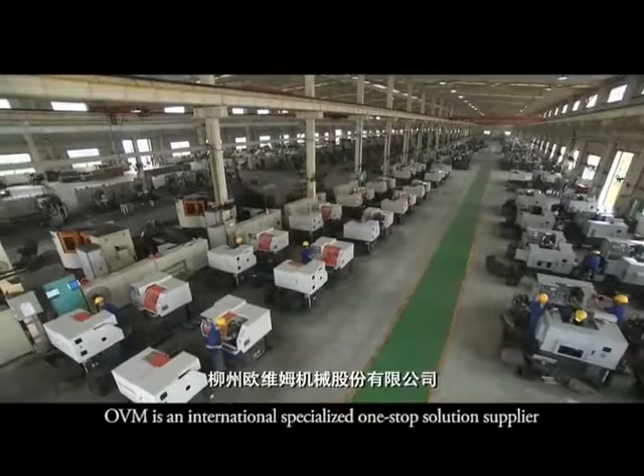OVM is an international specialized one-stop solution supplier focusing on research of pre-stressing technology, providing related systems and construction services.

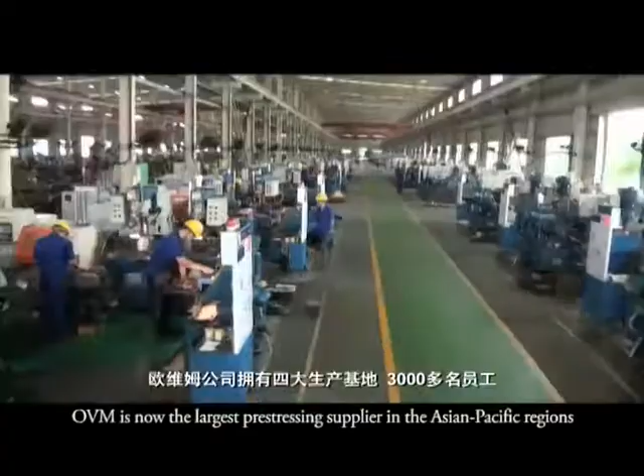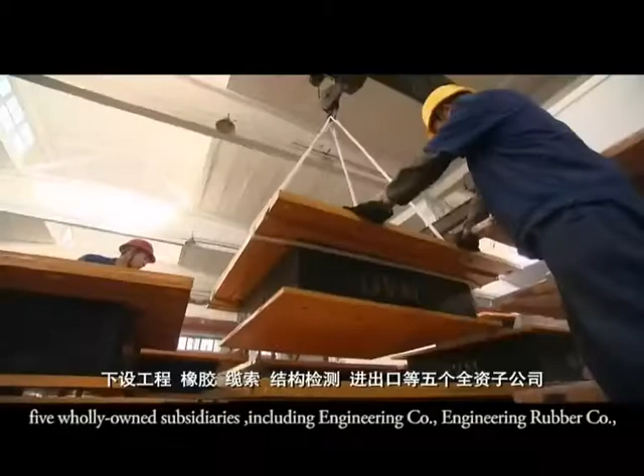Established in 1966 with the name of Liuzhou Construction Machinery Factory and renamed to Liuzhou OVM Machinery Company Limited in 2003, now a subsidiary of Liugong Group. OVM is now the largest pre-stressing supplier in the Asian Pacific regions, with 4 production bases, more than 3,000 employees, 5 wholly owned subsidiaries including engineering company, engineering rubber company, cable company, structure monitoring company, and OVM International Limited, and also the holding company of Shiping OVM Company and Hong Kong OVM Engineering Company Limited.

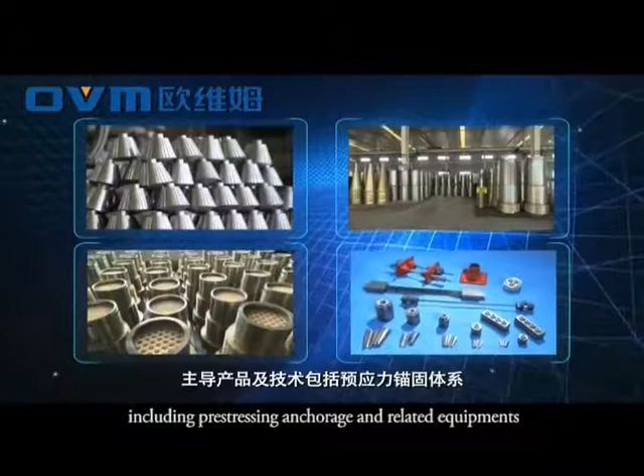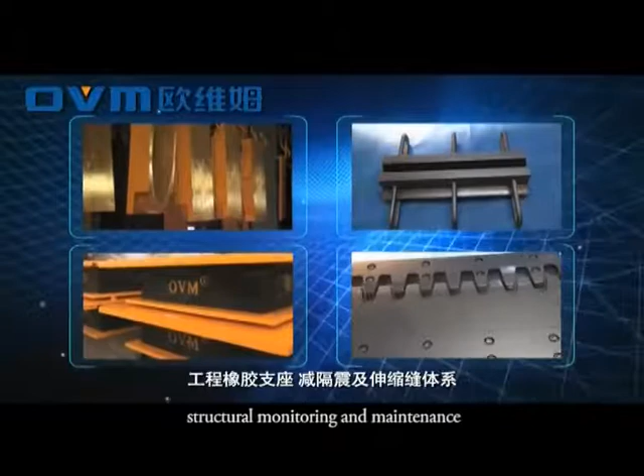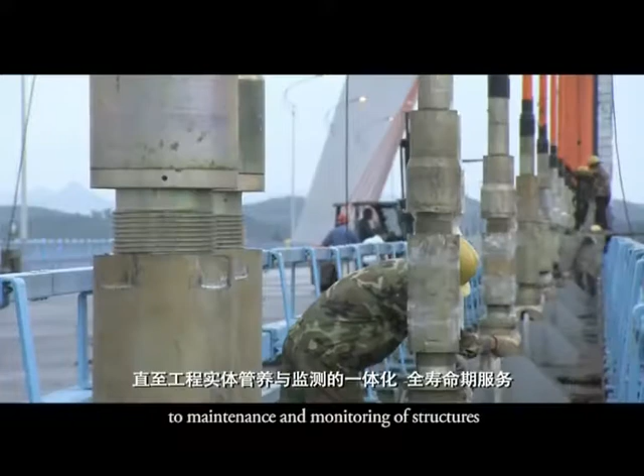OVM has 50 years experience in manufacturing and supplying pre-stressing systems, including pre-stressing anchorage and related equipment, engineering cable, engineering elastomeric bearings and expansion joints, anti-seismic systems, structure monitoring and maintenance, new products and materials. Based on these, OVM has the capacity to offer full-range services from consultation, design, production, construction to maintenance and monitoring of structures.

As the leading pre-stressing company in China, OVM always plays as the pacemaker in quality management. OVM is the first company qualified by ISO 9001 quality management system and BSI certification in Chinese pre-stressing industry, and also qualified by European ETA and CE certification.

OVM has more than 400 professional engineers and technicians, and has long-term cooperation relationship with more than 10 well-known universities. Hundreds of renowned professors and experts are invited to join OVM as technical consultant.

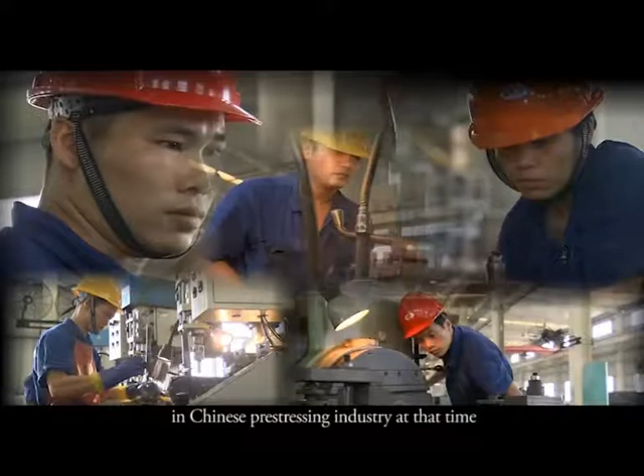In 1996, OVM Technology Center was entitled as National Enterprise Technology Center by Chinese National Development and Reform Commission and 3 other government ministries, becoming the only technology center to get this award in Chinese pre-stressing industry at that time. In 2001, OVM cooperated with Tongji University to establish Tongji OVM Pre-stressing Research Center.

After that, OVM Postdoctoral Research Center was set up. OVM always keeps a leading position in the field of Chinese pre-stressing technology.

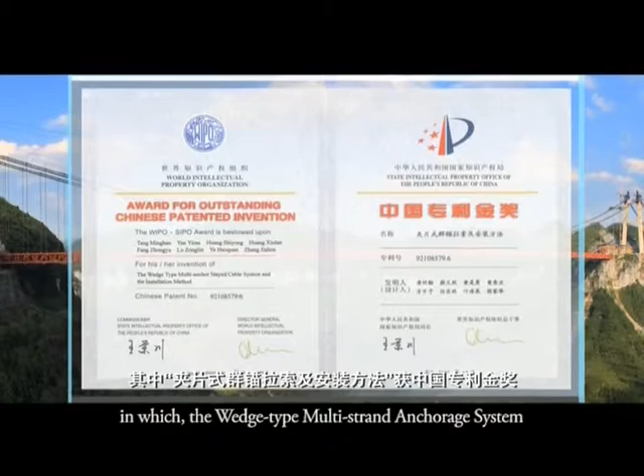OVM has participated in drafting more than 30 national and industry standards, achieved 56 national or provincial technological innovations, 36 patents for inventions, and 359 patents for utility models, in which the Wedge-type multi-strand anchorage system and its installation method was honored with the Chinese Patent Gold Medal.

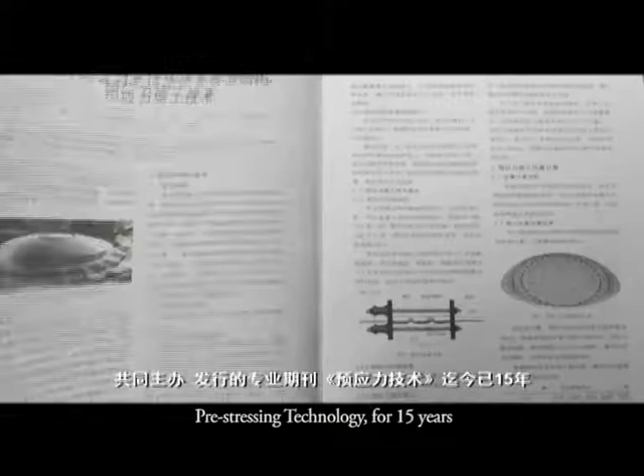In order to promote the development of the pre-stressing industry, OVM has sponsored and published the professional periodical Pre-stressing Technology for 15 years, which has become an important technology exchange platform for the pre-stressing field in China.

Complete and efficient marketing networks help OVM supply excellent products and services. In China, there are 7 regional marketing companies, including more than 30 marketing centers. The marketing network is spread all over China.

After 20 years of overseas development, OVM's global network covers more than 60 countries and regions around Asia, Africa, East Europe, Latin America, Middle East, and Russia. OVM's products and solutions have been extensively applied to the construction of highways, railways, bridges, buildings, mines, hydroelectric and nuclear power plants.

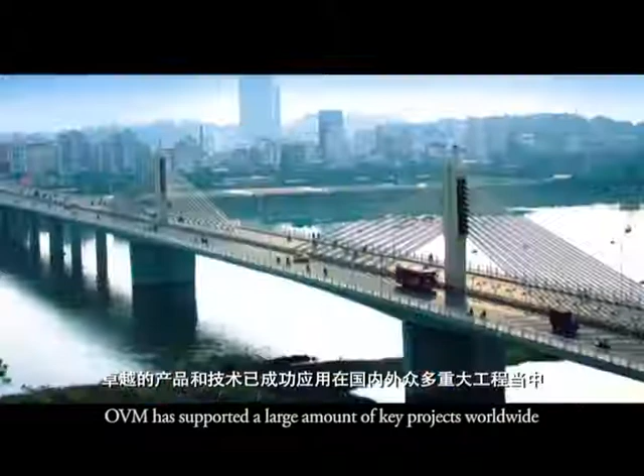OVM is the only Chinese pre-stressing company to enter the field of ocean salvation, nuclear power, and LNG. OVM has supported a large number of key projects worldwide with its high-quality products and excellent solutions.

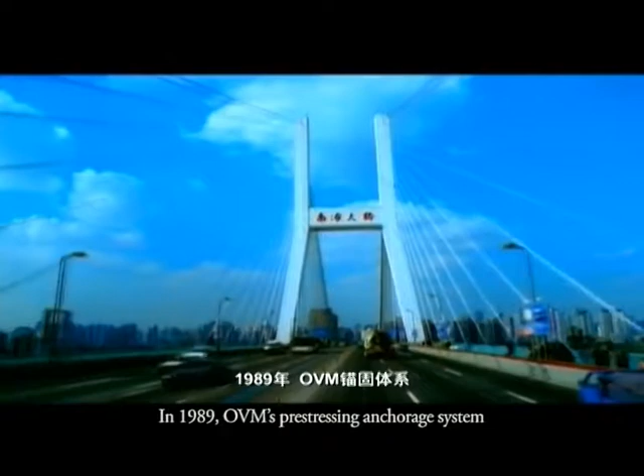In 1989, OVM's pre-stressing anchorage system was applied to Shanghai Nanpu Bridge. After that, in Yangpu Bridge, and the Beijing-Shanghai High-Speed Railway, OVM's pre-stressing anchorage system is widely used in numerous key projects.

In 1993, OVM lifting system was successfully used for construction of the Oriental Pearl TV Tower, lifting a 450 ton, 188-meter long antenna post to the top of the tower, which is 350 meters high.

OVM anchor block system for suspension bridges, OVM cable system, etc., were successfully applied to many projects in China and overseas.

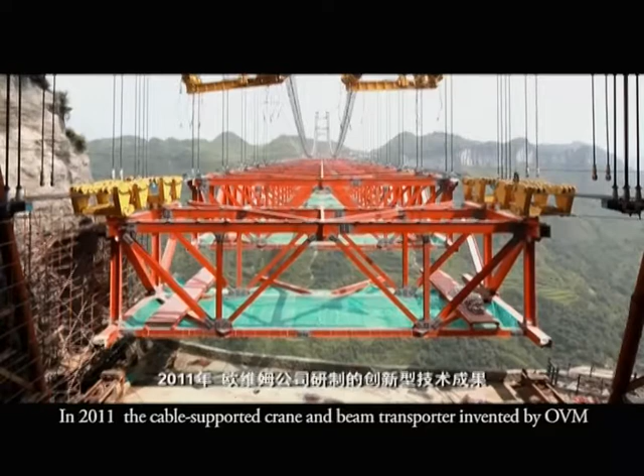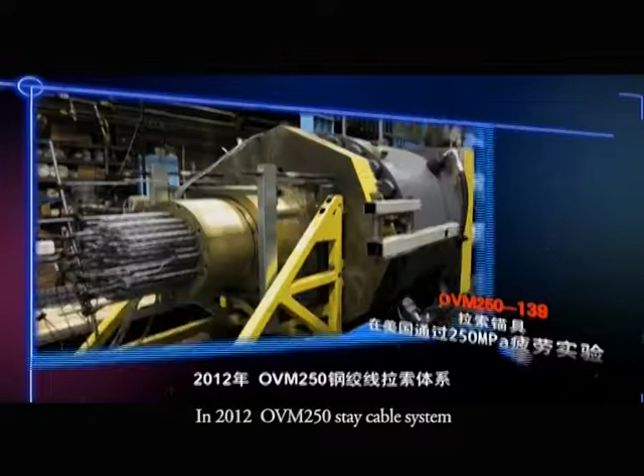In 2011, the cable-supported crane and beam transporter invented by OVM successfully worked for the construction of Hunan Aizai Bridge in China. In 2012, OVM 250 stay cable system with 139 steel strands passed 2 million fatigue cycles.

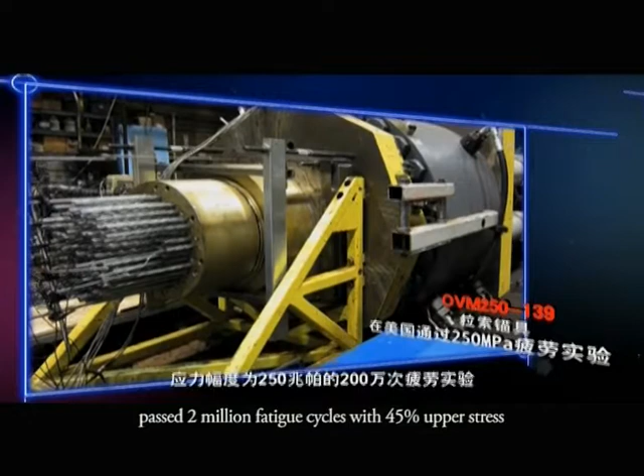With 45% upper stress and 250 MPa stress range in CTL America, this is the first and largest fatigue test for a stay cable system using strands worldwide.

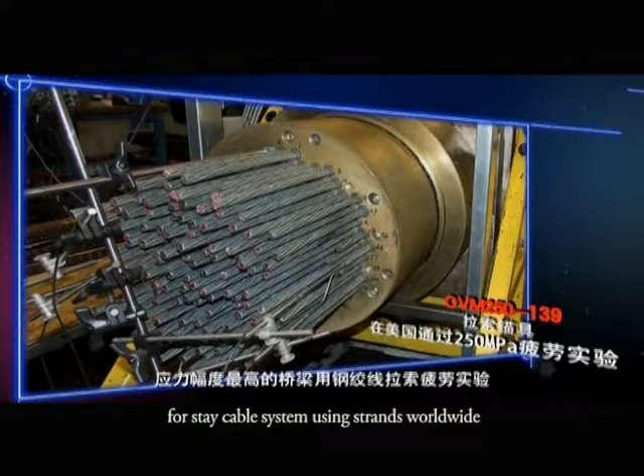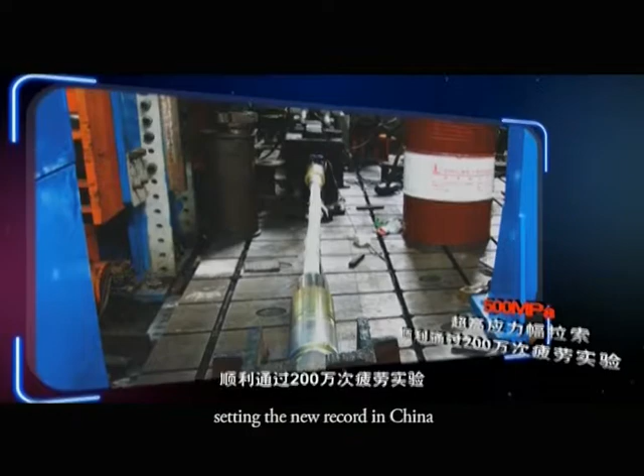In the same year, OVM high stress range stay cable system with 500 MPa passed 2 million fatigue cycles, setting the new record in China.

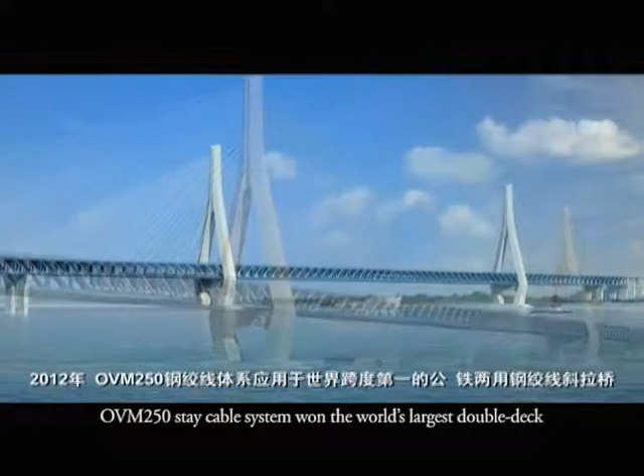In the same year, OVM 250 stay cable system won the bid for the world's largest double-deck highway railway cable-stayed bridge using strands, the Tongling Yangtze River Bridge.

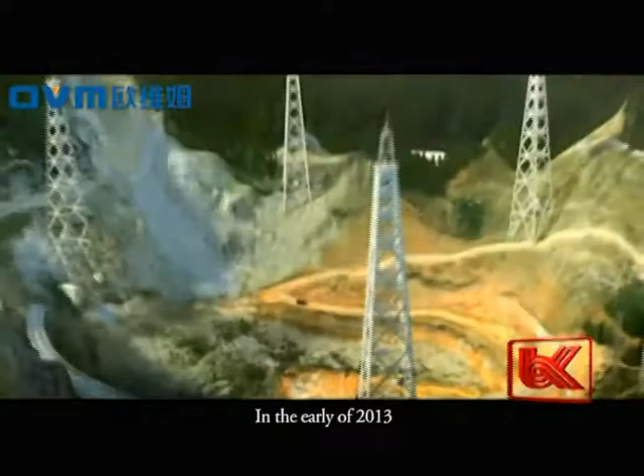In early 2013, OVM won the bid of the FAST project of the National Astronomical Observatories in China, the largest and most advanced radio telescope in the world.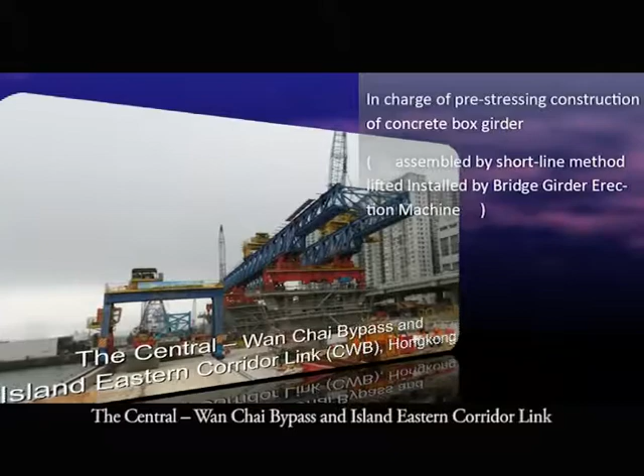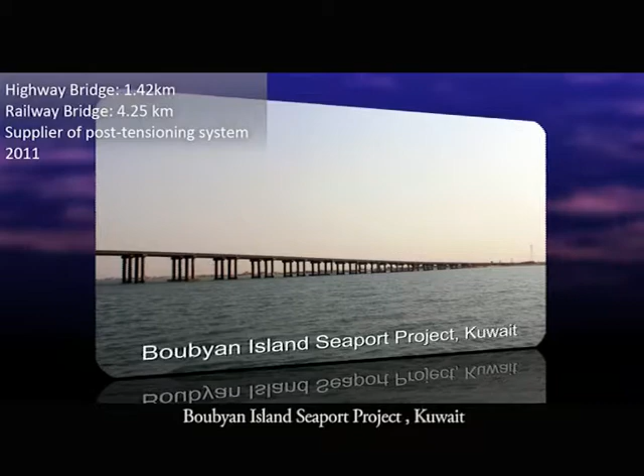Langkato Bridge, Indonesia; the Boubyan Island Seaport Project, Kuwait; and Langley Suspension Bridge, Myanmar.

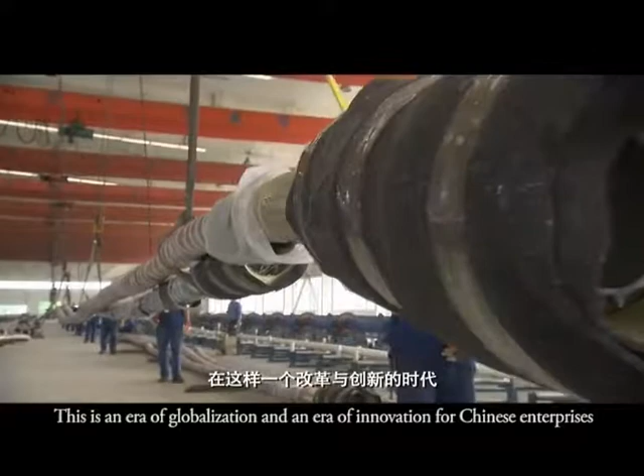This is an era of globalization and innovation for Chinese enterprises. Here is OVM Company Limited. We will spare no effort to make us a world brand in the pre-stressing field. Join us to make new progress together.

Gathering human wisdom, empowering the world.